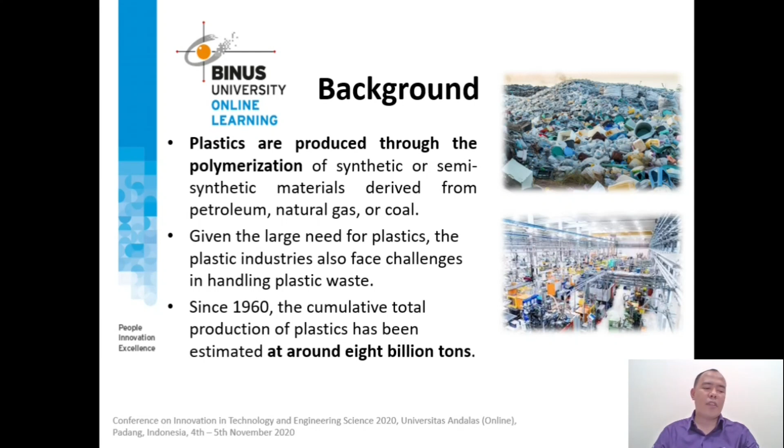Since 1960, the cumulative total production of plastic has been estimated at around 8 billion tons. Due to its non-degradable nature, unless incinerated or recycled, plastic waste will still exist.

The biggest problem in plastic manufacturing plants is waste originating from gas flaring and downgrade product, namely the off-spec product that does not meet specification standards.

Disposal of waste needs to be handled with further research, better technology, and more qualified resources so that the sustainability of the plastic industry can generate greater opportunity in the future.

This disposal activity is carried out through a series of material testing, deciding policy, and increasing the need for technology to separate and recycle plastic waste.

This process will be able to produce secondary plastics that are more competitive than continuing to consume or use pure polymer. Given that plastic waste is non-degradable, the waste will continue to pollute forever.

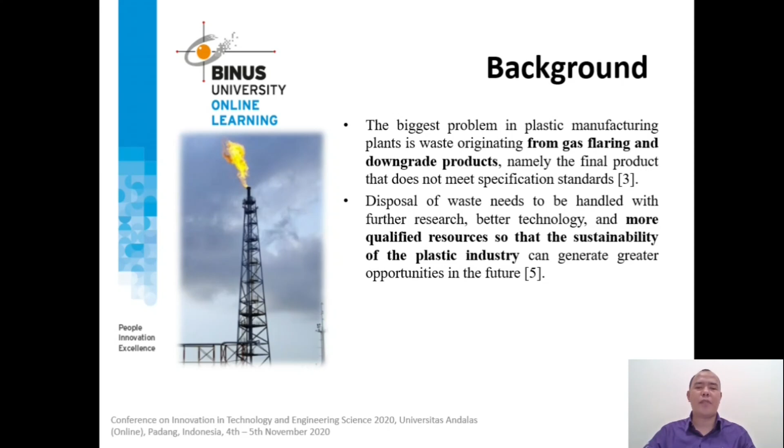With recycling technology, plastic waste will be reproduced in good quality without relying on the production of new virgin plastic material.

Plastic waste has become one of the major environmental issues, with its main polymer components being polyethylene and polypropylene. Separating plastic waste into individual polymers is expensive, and complete sorting is often not possible.

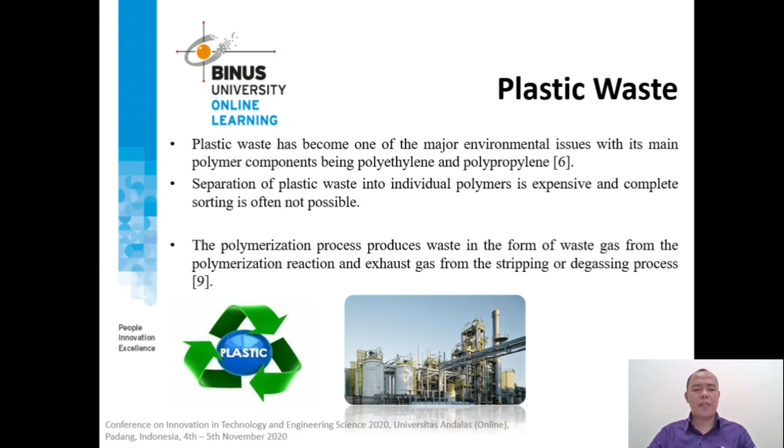However, off-spec plastic waste can be recycled easily by turning it into a polymer blend. However, there is a major limitation with polypropylene, which has a glass transition below room temperature and a high coefficient of linear thermal expansion. Thus, the way to reduce this deficiency is to blend or trim polypropylene using thermoplastic technique.

Flaring or combustion from industry cannot be avoided but can be reduced. There are several ways to reduce flaring, for example by implementing a procedure on how to adjust the process rate to prevent or minimize flaring. The use of flare gas recovery is very important in the industry.

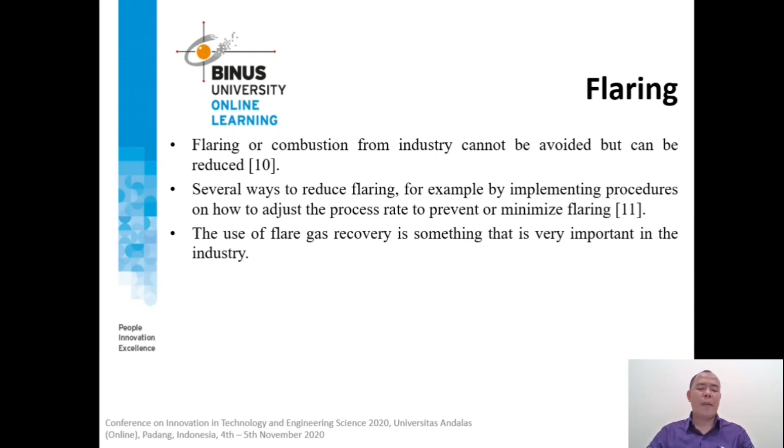In addition to reducing the greenhouse effect and environmental pollution, it is also very useful in reducing the cost of hydrocarbon loss. Limitation of technology costs, company vision and mission, and the human side are the main factors, outside government regulation, that can determine a company's policy in managing asset optimization.

This contributes to implementing waste management, especially sustainable management strategy. The study aimed to discuss how to recycle waste gas from the degassing process by separating nitrogen, light gas, and hydrocarbon so that it can be reused in the gassing process.

And in producing raw material using flare gas recovery technology. This study seeks to design innovation on how to reduce or eliminate off-spec product using mixing technology or trimming facilities.

Based on the background description that has been stated, a way is needed to seek the benefit obtained from placing the recovery unit, especially for sustainable waste management. An optimal strategy is needed to utilize the trimming facility in reducing or eliminating off-spec product.

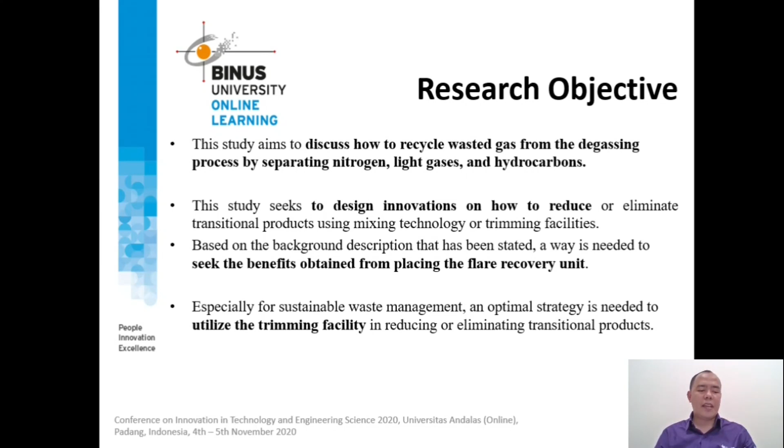The research method used an integration of qualitative and quantitative methods in the process of data collection and processing. This research was conducted to analyze the work system and process optimization in the flare recovery unit facility as part of sustainable waste management effort.

The study aimed to determine the optimal amount of regression in process waste gas so that it can provide benefit from both financial and environmental sides, as well as finding the best solution in increasing company profit by utilizing a mixing facility or trimming facility from non-prime product to prime product.

This research was conducted in a plastic production company, especially in the United Arab Emirates. We know United Arab Emirates is one of the largest plastic producing countries in the world.

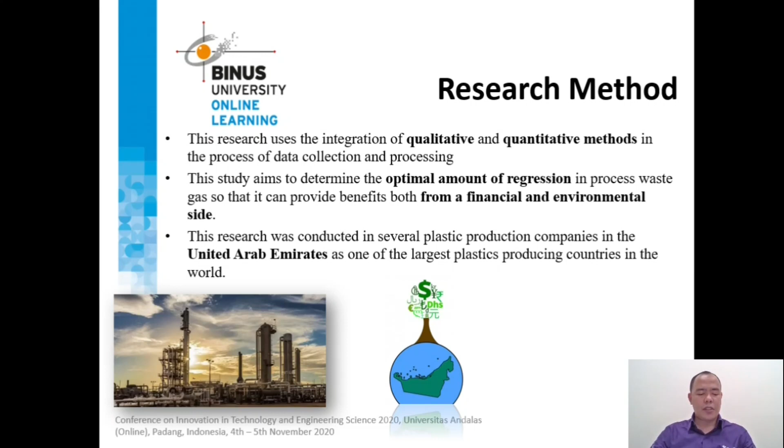The technical method used was in the form of observation and data collection related to the degassing process. Data analysis was performed on monthly reports of energy balance and total gas from each unit, including the degassing system unit. Data collection on the number of total transitional product resulting from each product changeover, and data obtained from monthly reports where the number of prime and non-prime products is recorded.

Monitoring is carried out on the sweeping process between nitrogen gas and hydrocarbon on the DCS, or distributed control system, live screen to obtain live data.

Data analysis is focused on the degassing processes and other activities through graphics and histograms, especially related to reliability, FRU load, monthly carbon dioxide reduction chart, percent hydrocarbon and nitrogen based on design chart, and off-grade comparison with or without trimming.

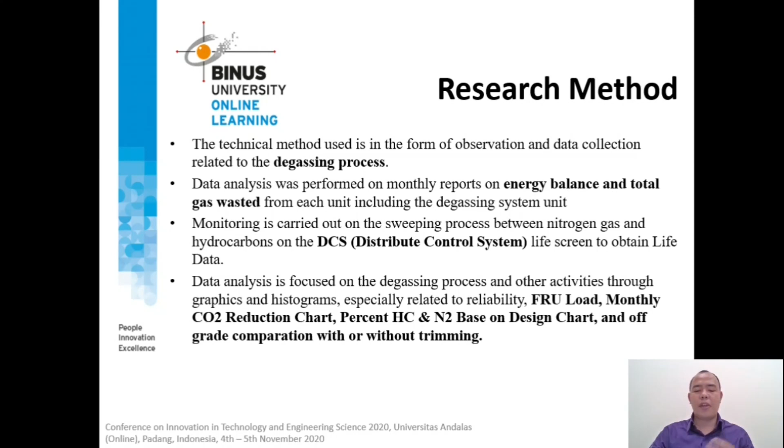For this chart, the result of the analysis and observation of the degassing system and flare recovery shows that for polyethylene plants...

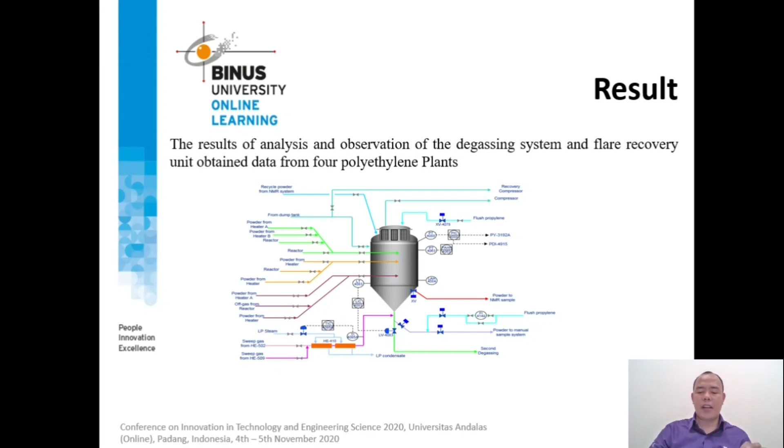...such as the amount of nitrogen, the amount of feed gas available, utility consumption such as electricity or power, the cooling system, cooling water, glycol water, polyethylene refrigerant, plain water, and steam running hour and cost of the production process. Next, an analysis of recovered nitrogen and hydrocarbon is performed, along with an analysis of the reliability of the system.

The first analysis is technical analysis. We can focus on recovering nitrogen and hydrocarbon. This picture illustrates how the recovery unit provides the ability to recycle gas or feed it into the degassing unit.

In the months of March, April, and May, the chart shows zero points. This is because during these months no feed was received due to the plant shutdown.

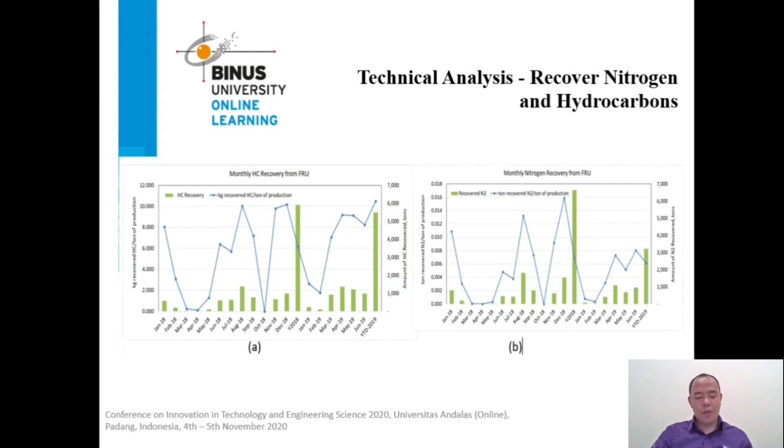The second analysis, shown in the picture, reveals a very significant difference between 2018 and 2019. In 2018, mechanical failure from the compressor contributed the highest, around 76% of the total downtime of 3,009 hours from 22 stops, followed by turnaround.

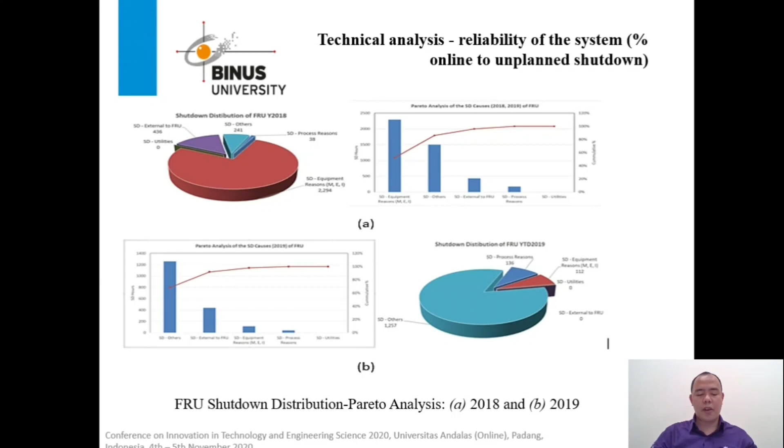The flare recovery unit vendor was brought in to repair the flare recovery unit, and the manufacturing company worked to restore the direction of the company from the decline in performance, restoring the company's performance.

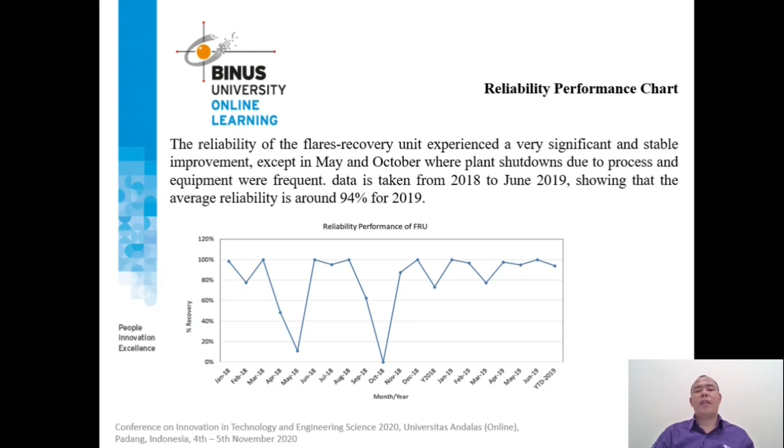The reliability of the flare recovery unit experienced a very significant and stable improvement, except in May and October, where plant shutdowns due to process and equipment issues were frequent. Data is taken from 2018 to June 2019, so the average reliability is around 94% for 2019.

The next analysis is environmental impact, the carbon dioxide footprint analysis. Carbon footprint is the amount of greenhouse gas emission produced by an organization, event, product, or individual. To obtain the carbon footprint of the flare recovery unit, the total hydrocarbon recycled is divided by ethylene as the reference gas most contained in the gas system.

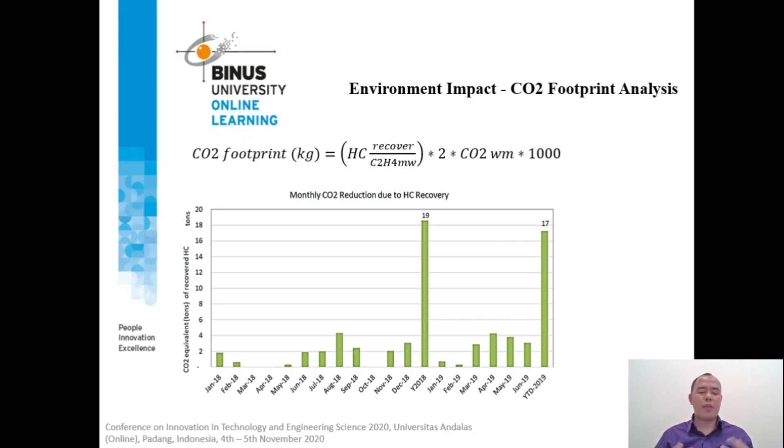The picture shows adding exhaust gas to the flare recovery unit for recycling provides enormous benefit, apart from cost reduction as well as environmental issues. It appears that the greater the ability to recycle hydrocarbon, the more we contribute to reducing emission. In other words, the smaller the amount of carbon dioxide, if the hydrocarbon are not burned.

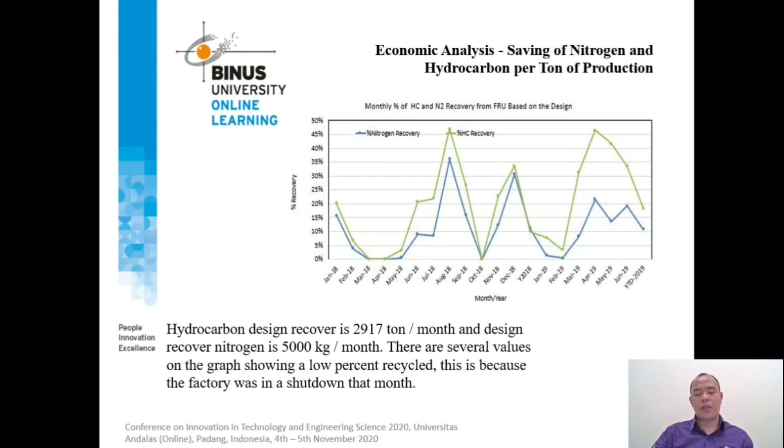The next analysis is economic analysis, saving of nitrogen and hydrocarbon per ton of production. This picture shows the reference percent of nitrogen and hydrocarbon recycled per month. Percent recovery is obtained from the hydrocarbon and nitrogen recovered material against the flare recovery design.

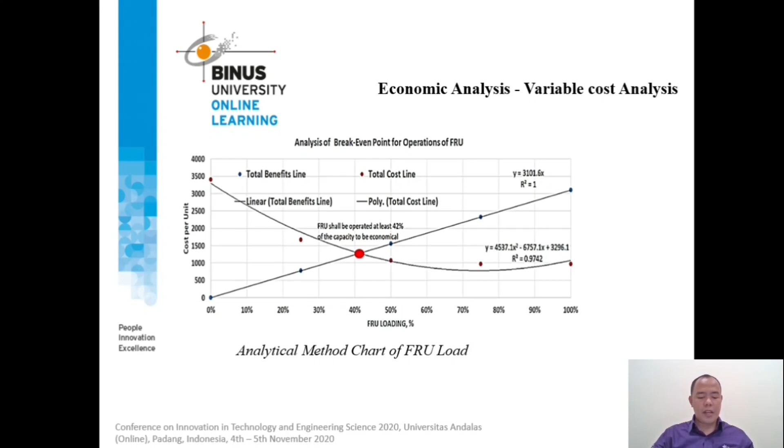The final analysis is economic analysis for saving through upgrade of transitional material. The number of material transitions successfully trimmed varies depending on how many products must be produced of each product. In one month, about 800 to 1,200 tons of transitional material are produced as product and result. The price difference between transitional product and prime product is around $300 per ton.

The percentage of material transition that can be mixed or successfully trimmed increases the profit of the company. We can see in this picture the monthly saving after trimming between transitional product, also called near prime grade, and product that has prime quality. The bar graph shows saving equivalent to $1 million, while the line chart shows saving in unit per ton of production.

In 2018, the use of trimming was more conservative to confirm or prove if there was influence on the product quality. Trimming saw a significant increase in 2019 after production and marketing parties were quite well established and successful in managing the trimming system operation while maintaining its quality. The amount of profit in 2019 was also caused by change in product demand due to a variation in supply and demand.

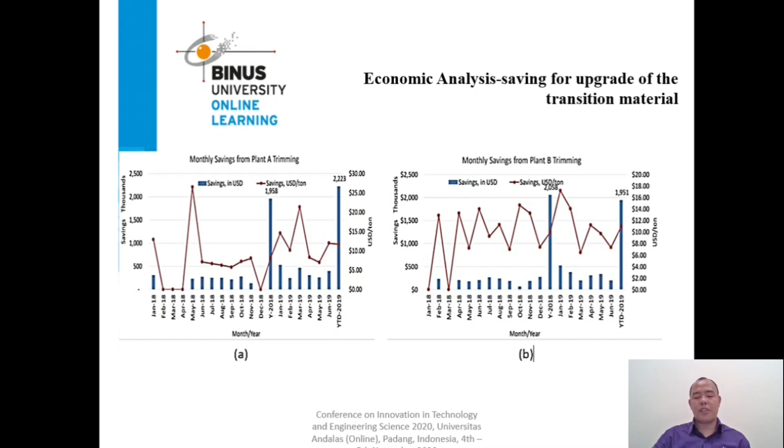In conclusion, we can conclude that the implementation of recycling technologies such as the flare recovery unit and trimming system has not yet reached its full potential. Many gas and petrochemical factories that have been running still have not utilized recycling technology for exhaust gas and reducing product offs with the trimming system. Optimizing exhaust gas utilization through the flare recovery unit from continuous flaring resulting from the degassing process in the purge bin has very significant progress.

We propose the trimming system as one solution to reduce or even eliminate transition product, making transition material into the prime product. As part of the role of production planning in scheduling product cycles, the reliability and operability of the trimming system are important factors in reducing or eliminating such material. The more reliable the system, the more benefits we will get.

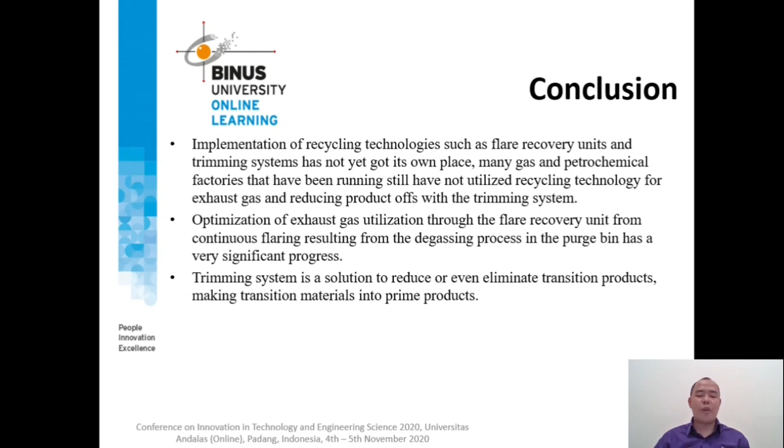For future research, it's necessary to improve the flare recovery system processes and the trimming system. It's necessary to develop standard operating procedures, preventive maintenance, and corrective maintenance as important elements to be maintained. New innovations such as the addition of a GAR filter at the outlet of the second degassing tank may need to be installed. For the final product that passes through mixing or trimming, it's advisable to add additional treatment in the pellet silo, for example, adding blending before the product is bagged or packed.

Okay, that is my presentation.